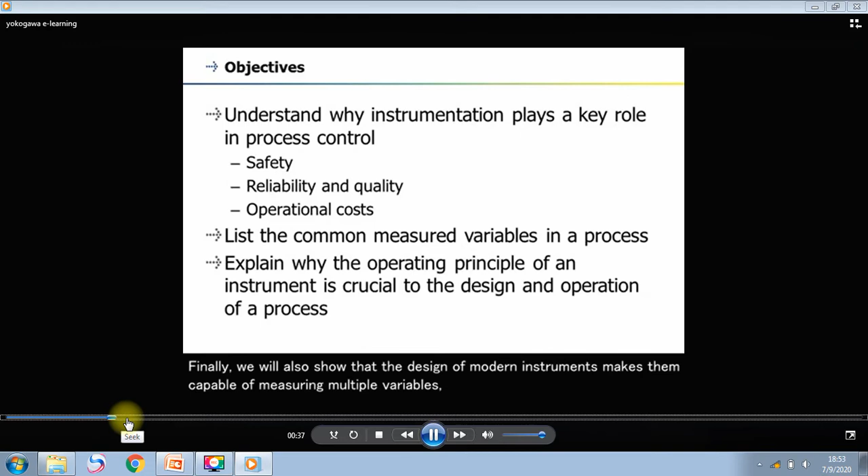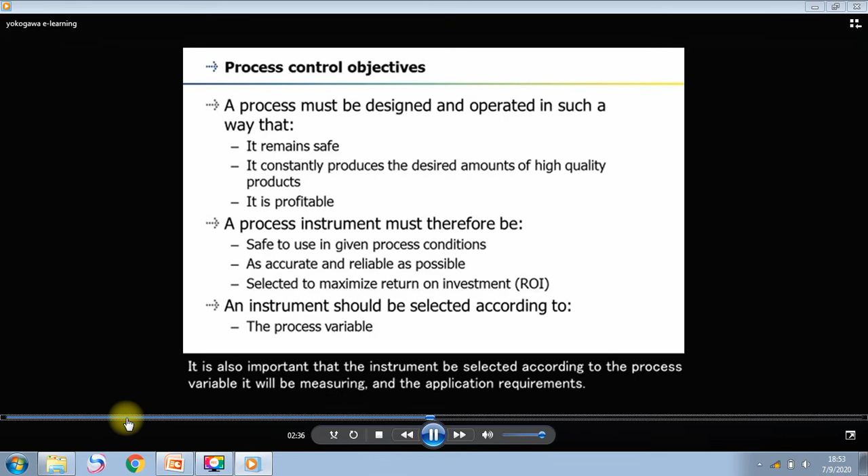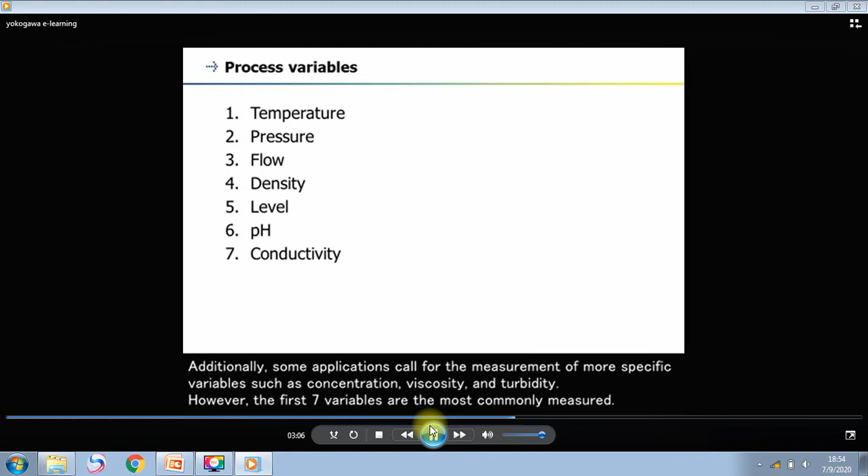Industrial process. Additionally, some applications call for the measurement of more specific variables such as concentration, viscosity, and turbidity.

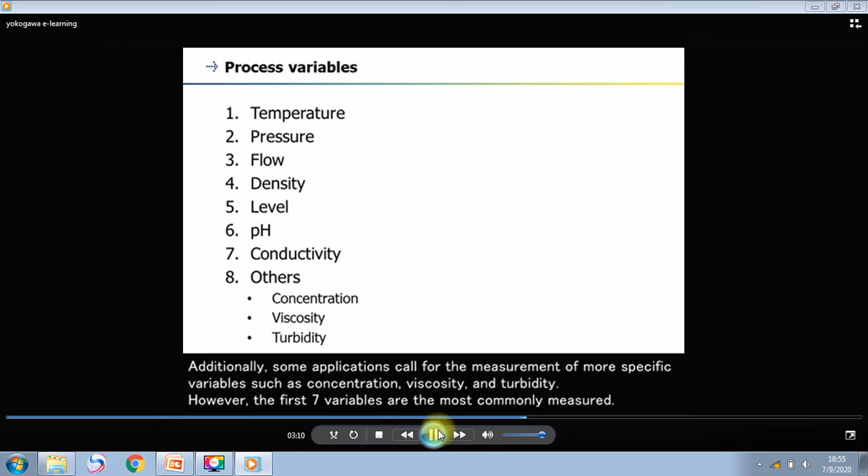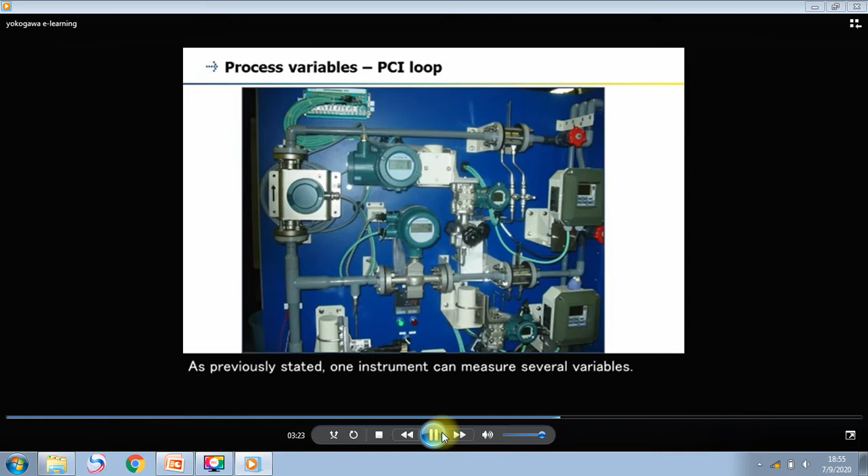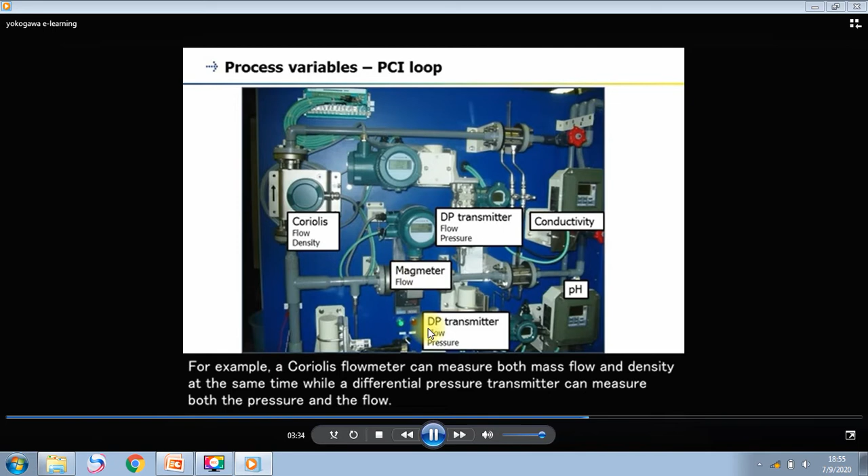As previously stated, one instrument can measure several variables. For example, a Coriolis flow meter can measure both mass flow and density at the same time, while a differential pressure transmitter can measure both the pressure and the flow. DP transmitter. This is another way of visualizing the different process layers.

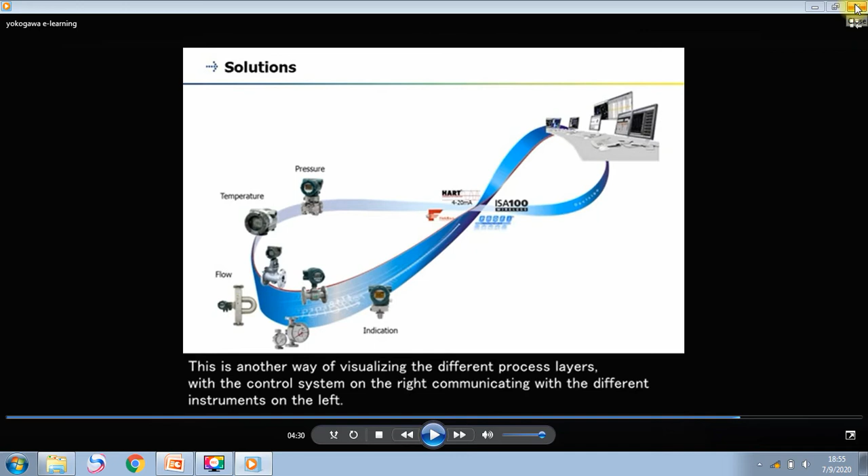But they both measure flow. How an instrument works, its operating principle, also influences whether it can be selected for an application.

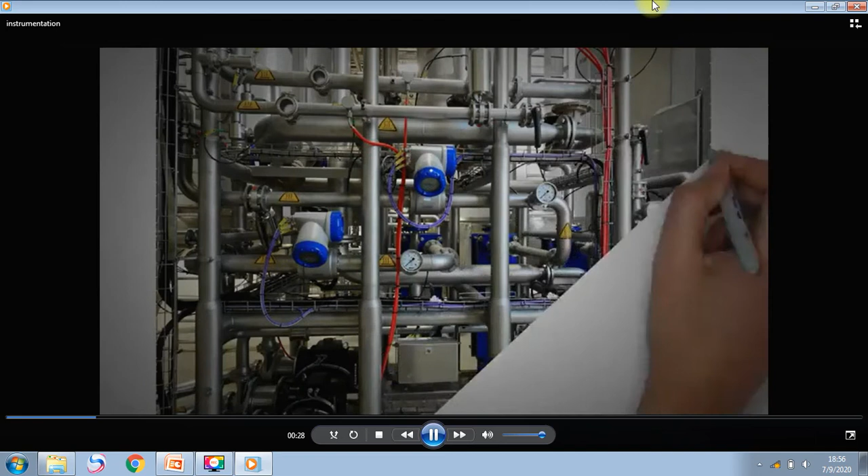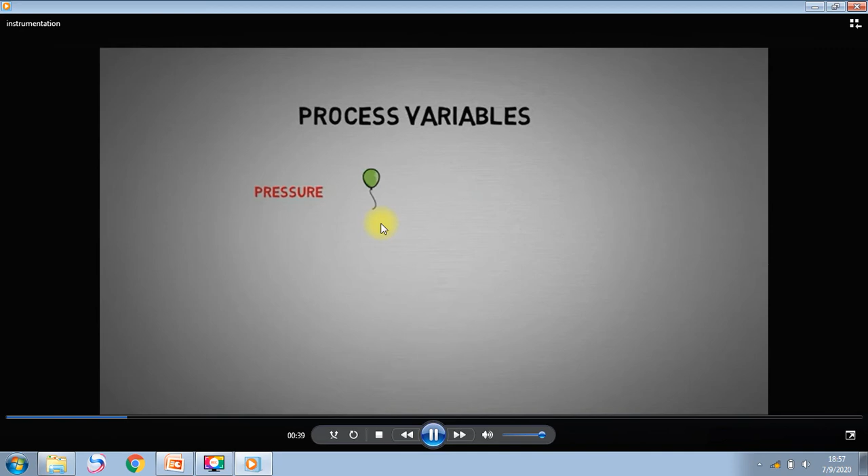Gas within the pipework. Temperature, a reactor, for example. Flow: the flow of chemical dosing in a process plant. Level: this could be the height of liquid in a vessel. And pH: this could be the pH of a wastewater system, for example.

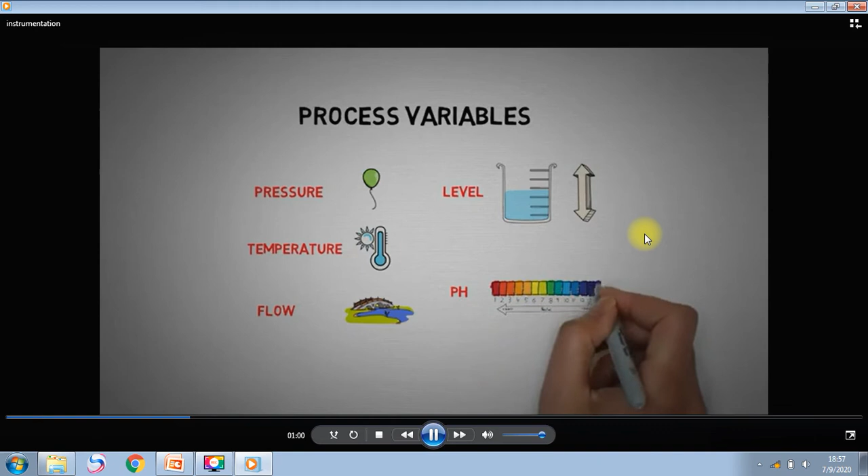We work on all the equipment that measures and controls these process variables. All of this equipment forms part of a process control loop that aims at controlling a process variable at a desired set point. A process control loop is made up of the following parts.

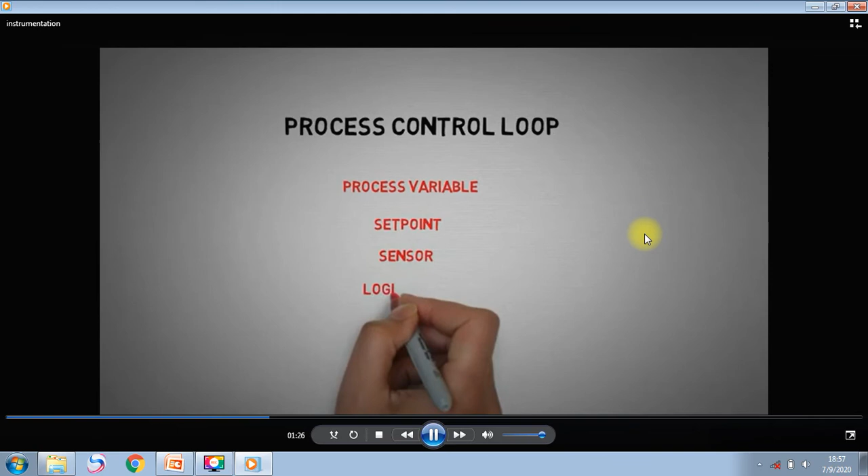A home heating system. Now, this isn't exactly how all heating systems work, but it will help us understand the process control loop in terms we're all familiar with. In our example of a home heating system, we have all the components of a process control loop. So let's start with the set point.

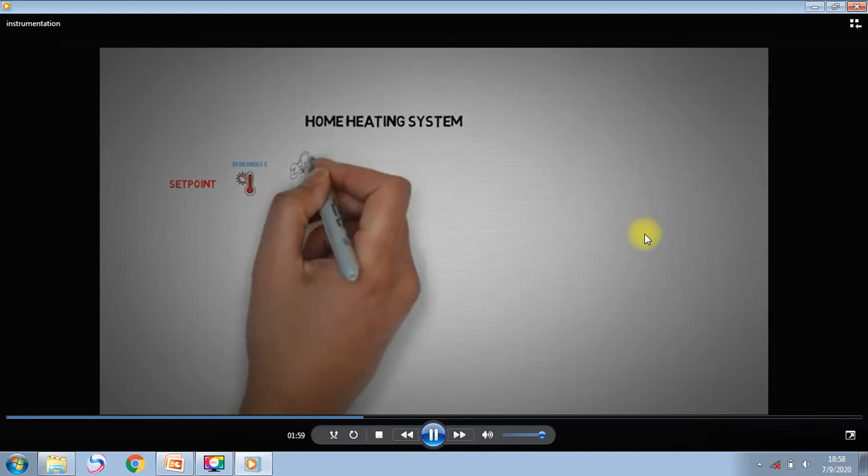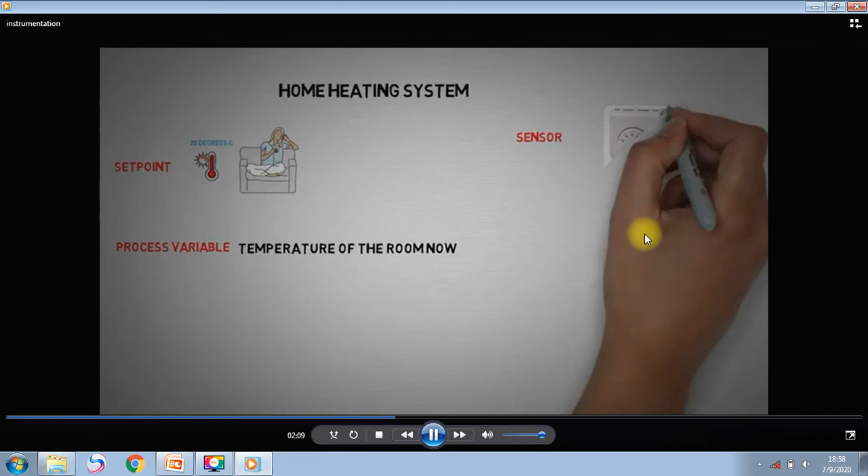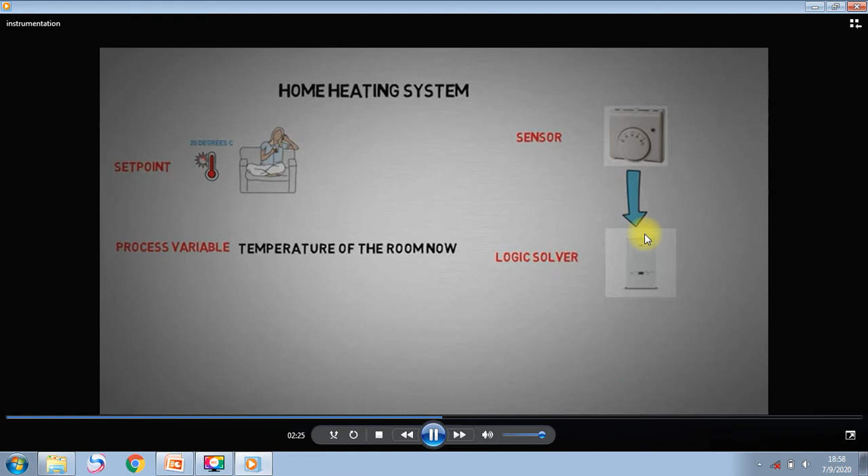This is the actual temperature of the room at this very moment. In this example, the thermostat of the heating system is the sensor. It senses the temperature of the room and sends a signal of the current temperature to the boiler. Moving on to the logic solver, our boiler electronics is acting as the logic solver. Now this compares the set point, which is the temperature we want our room to be, to the process variable, the actual temperature of the room.

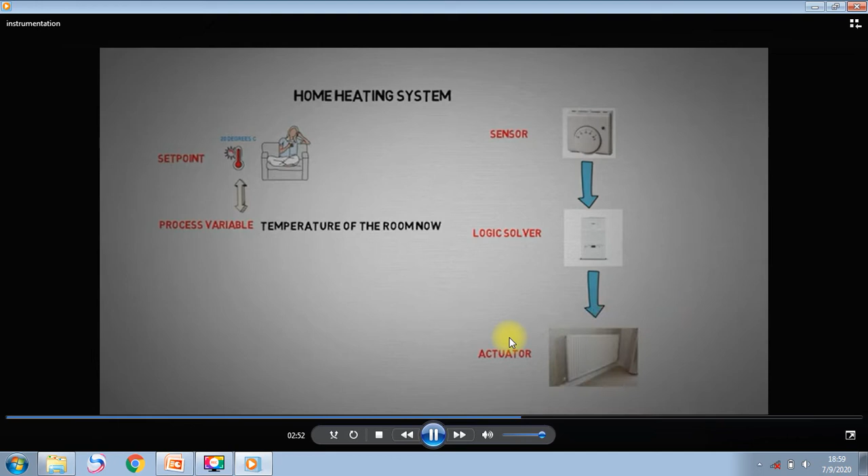Now this is exactly the same in industry, although sometimes things are a lot more complicated. So now we know what a process control loop is. I'm sure you all want to know, what do instrument techs do with these control loops? Well, there's quite a few different tasks that an instrument tech will do. They will do calibration of the sensors.

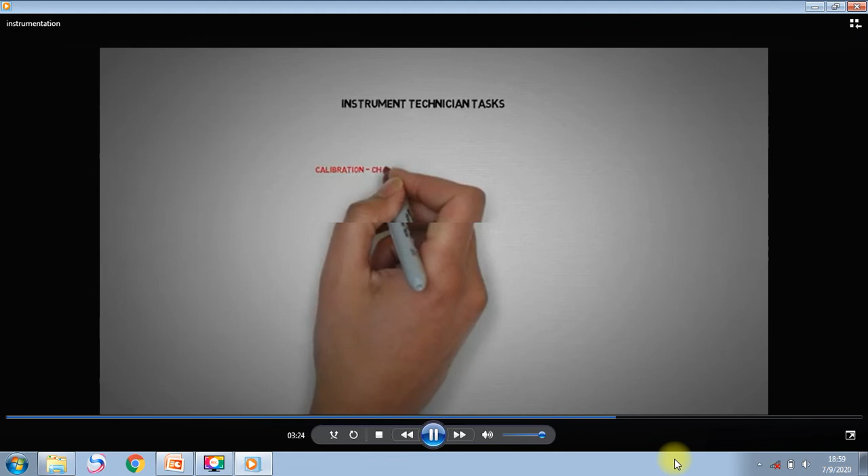Now, this is a task that compares the sensors against a known constant in order to ensure accuracy of the equipment.

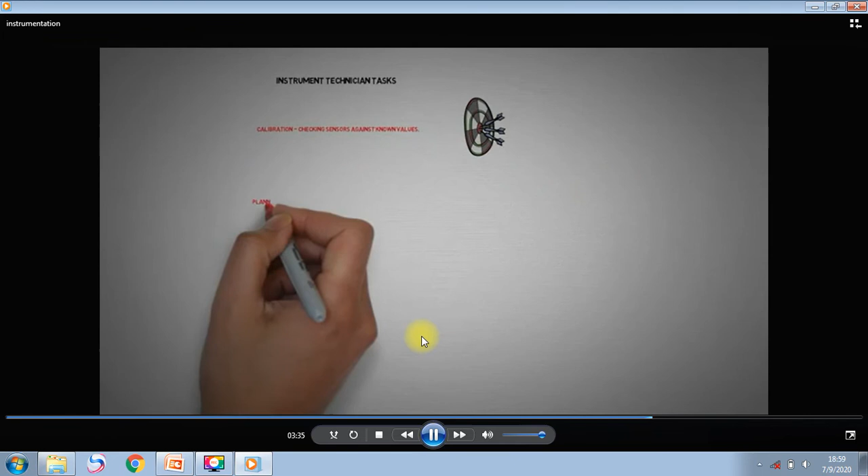Function testing of the equipment to make sure it's behaving as expected.

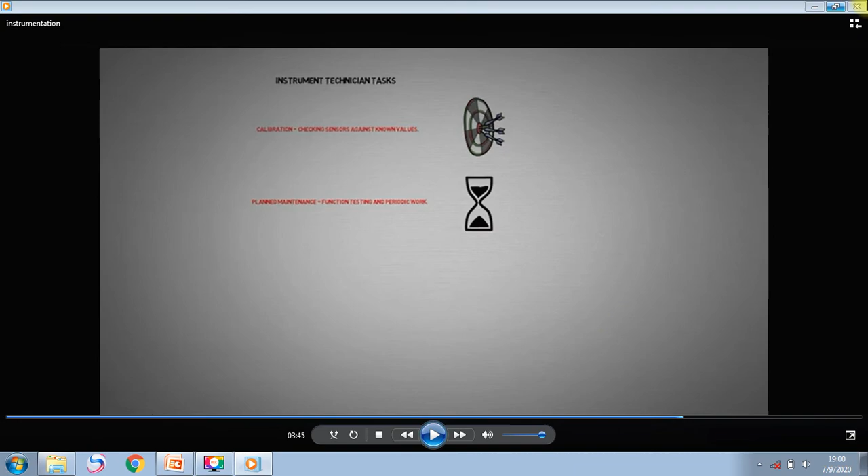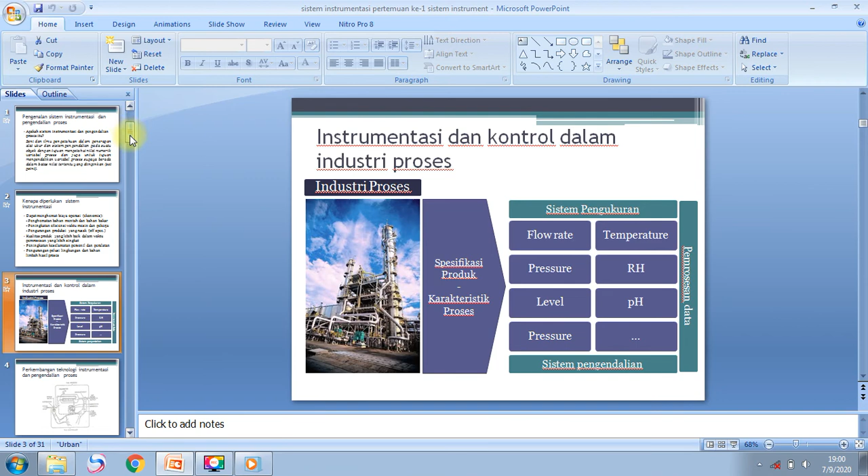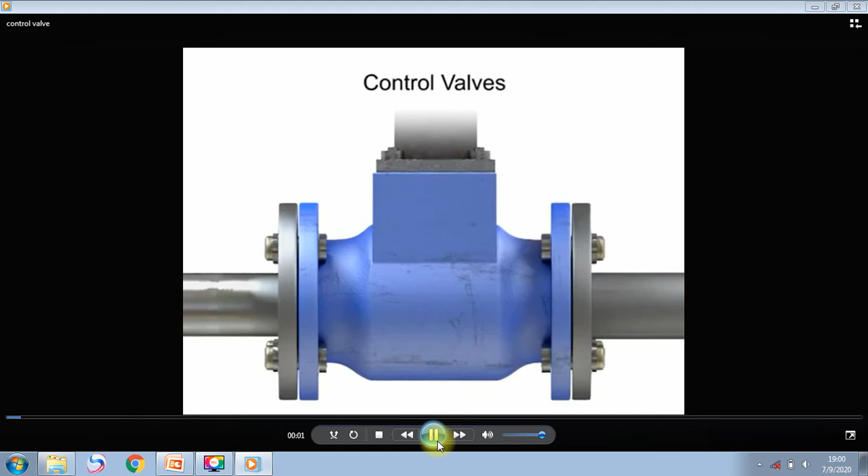Control valve actuators control fluid in a pipe by varying the orifice size through which the fluid flows.

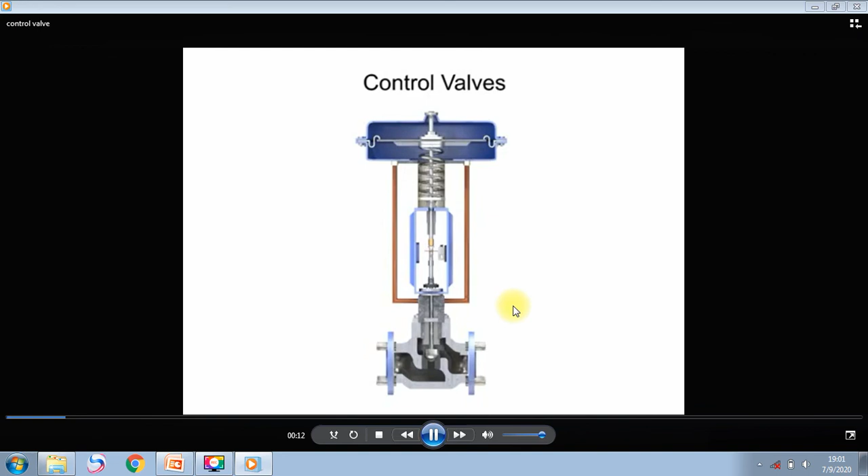Control valves contain two major components, the valve body and the valve actuator. The valve body provides the fluid connections and a movable restrictor comprised of a valve stem and plug that is in contact with the fluid that varies the flow. The valve actuator is the component that physically moves the restrictor to vary the fluid flow.

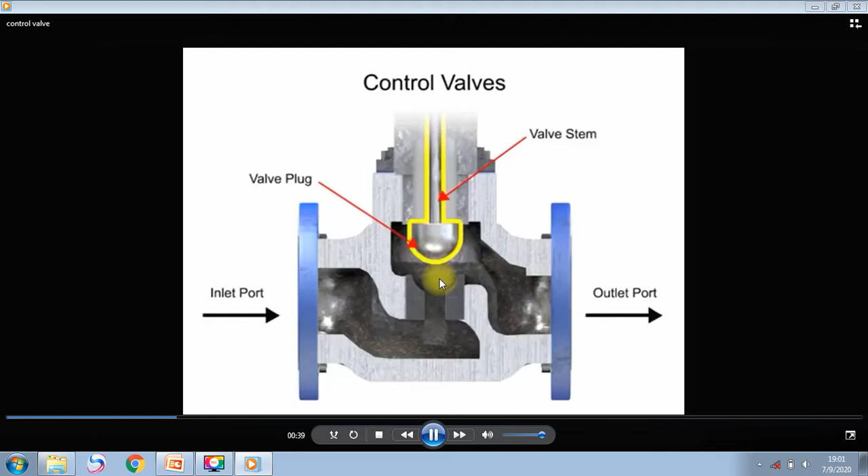3 actuator types are used in control valves, and they include spring and diaphragm, solenoid, and motor. The spring and diaphragm actuator uses a spring and a diaphragm to move the valve stem and plug. A 15 psi pneumatic signal enters the housing at the top of the actuator. As pressure is exerted on the diaphragm, a downward...

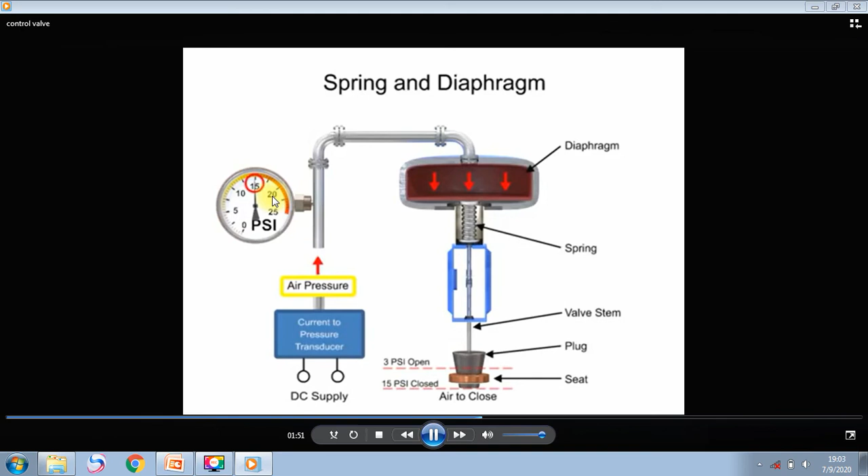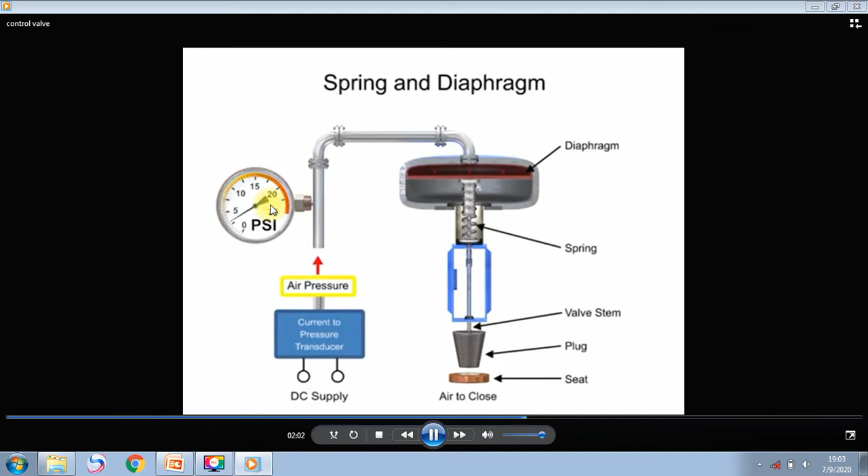3 to 15 PSI, 0.2 to 1.0 bar range proportionally change the flow of the valve. For example, a pressure of 9 psi applied to the diaphragm moves the spring and valve stem to 50%. 9 PSI equals 50% of the opening range.